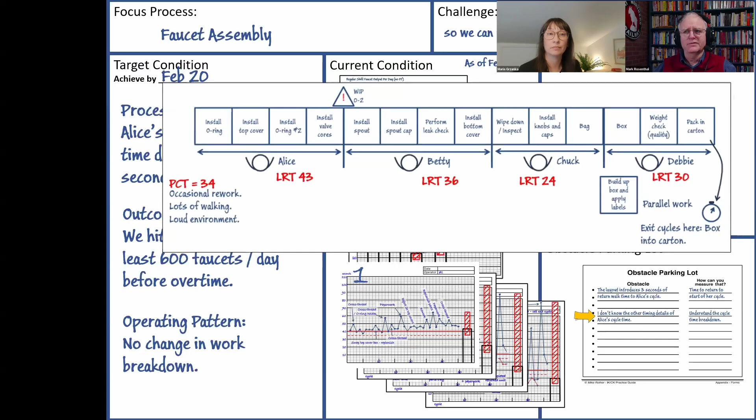Okay, what is your actual condition now? So the actual condition now is against the challenge of 700, and then the current requirement of 650, and you can see that we are on a daily basis, we're flirting with 600 and not even making that consistently. If I start looking at the process, the actual steps of the process, we've got 4 people: Alice, Betty, Chuck, and Debbie all working on the assembly line, and it's actually a pretty smooth flow. I just think there's a lot of issues with work balance and interruptions.

So you can see on the load chart here that the reason I'm going after Alice's lowest repeatable time is that her lowest repeatable time is right now even exceeding the takt time for 650 a day. So we're not even going to make 650 until we deal with that. Plus, you can see there's variation that cascades down the line. If I look at Alice's work cycle specifically, you can see that each cycle pretty much flirts along that line of just above 40, but there's also interruptions and variation involved.

I'm working right now just to drop the floor there so that we can at least start to get some consistency and see what the impact of the variation is. Okay, what did you plan as your last step? My last step formally was to just do some math on those lowest repeatable times in order to see if 4 people are even possible to get this done.

And what did you expect? So I predicted that 4 people were going to be enough to get to 650 if we can address the wait times and the variation. And what actually happened?

Well, math gave me a 3.9. So, yep, 4 people, we should be making 650 with 4 people.

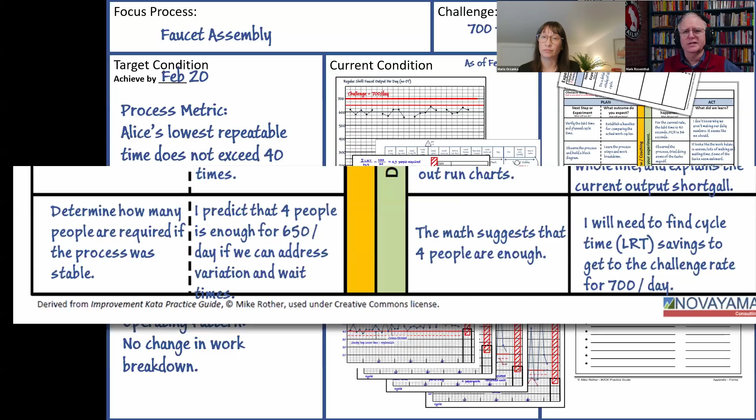So what obstacles do you think are preventing you from reaching your target condition? So there's a couple right now that are obvious. One is Alice's cycle includes 3 or 4 seconds of return walking time. And the other one is I don't know what other timing details are affecting Alice's cycle.

Which one are you addressing now? So I need to get more information. So I'm going to address the fact that I don't know enough of the details for Alice's cycle time.

And what is your next step? So my next step is to get back out on the line and do a detailed time study of Alice's work. And what do you expect? I expect to learn where the time goes, and just to put it in the most simple terms, what are the sources of delay? Where's the time going? Where's the wasted motion here?

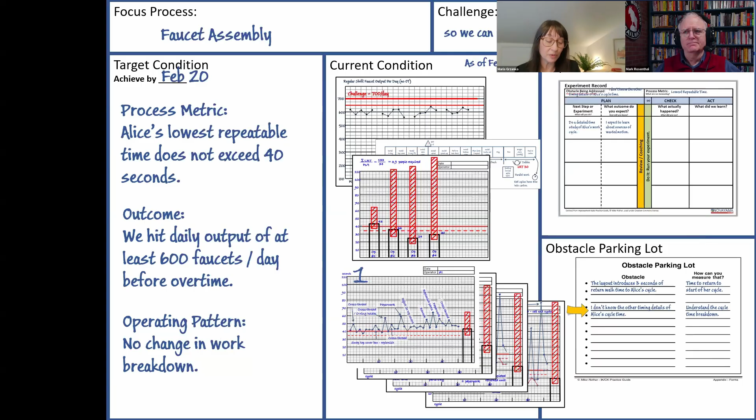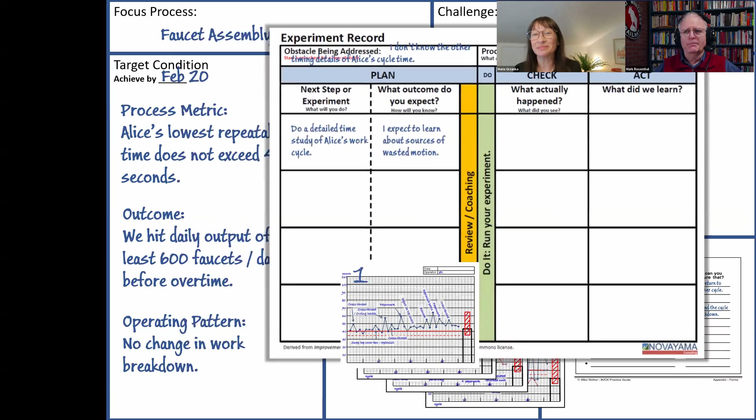And how quickly can we go and see what you have learned from taking that step? Actually, I expect to be able to do this in a couple of hours, so we can talk about this tomorrow. Great. Thanks, Mark. Okay, with that as a baseline, let's look at where we are.

Let's orient. Those 5 coaching questions happen here. So a target condition's been established, and now we've got obstacles, and this is where we get the coach into the cadence of those 5 questions.

In our last episode, we covered understanding direction or challenge, and that shows up on the storyboard here up in the corner, where we write down the challenge and we establish that.

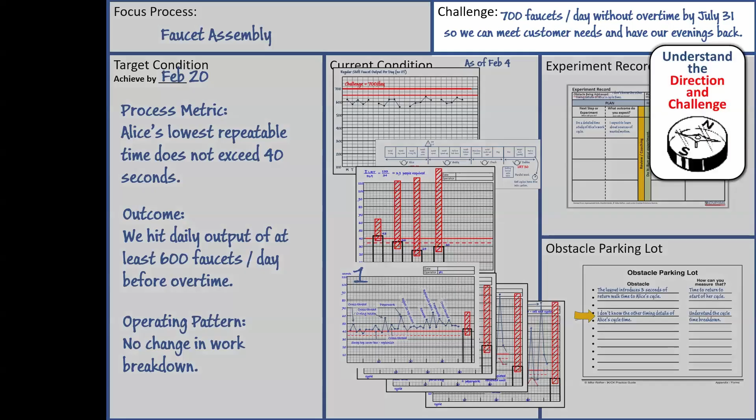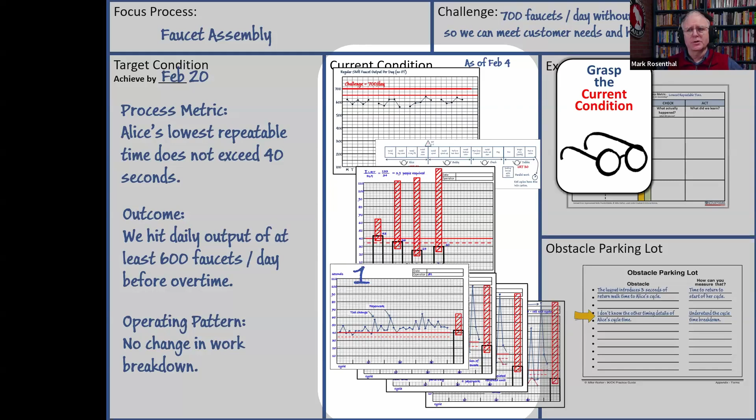Today, we are talking about this step of grasping the current condition, which is what shows up on the storyboard in the center part. And there's a lot here, and what I plan to do is just go through each of these artifacts a little bit quickly about how they're made, but really the context is what information is the learner gaining by actually doing this work.

There's some key questions we want to coach our learner to finding the answers to. How are we doing against the challenge? And that's establishing that outcome metric, which Tracy talked about last time. Where are we versus the goal? What does the customer need? When do they need it? What's the definition of on time and defect free, if that's relevant?

How are things operating now? What's the normal pattern of work? What are the actual process steps that people are carrying out today? And what is the actual rate and timing of the cycles of output at each step of the way?

Do we even have capacity? If I do some math, how many people would be required for success if our process were stable? And do I have machine constraints? And then really, what does all this mean? Why does the process perform as it does?

And the coach's objective is for the learner to be able to really answer questions like these and point to facts and data to answer them, not just speculation.

So I'm going to start really quickly with the first, because Tracy kind of linked to this last time. If I look at the storyboard, as I'm taking that challenge and I'm just pulling it down, I'm saying, what do I need to measure to tell me if I'm meeting the challenge? In this case, it's really easy and really obvious.

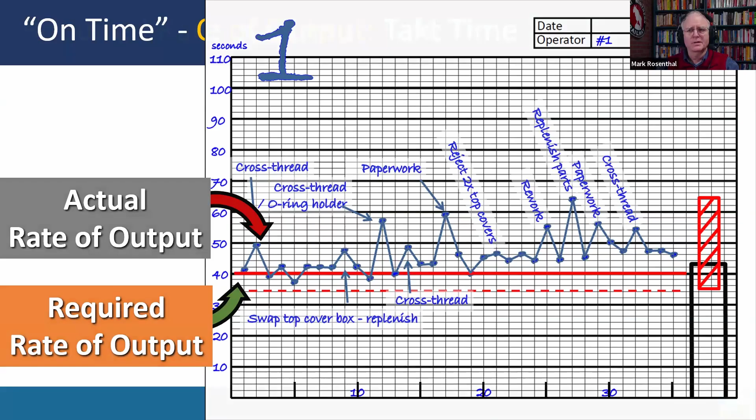It's just math in this case. I've got a one shift operation, it's 8 hours, that gives me 480 minutes, but I've got breaks, a meeting, some cleanup, so I've got 435 minutes to actually make stuff during the course of the day. That's 26,100 seconds. Right now, even before we hit the challenge, we need to get 650 units out every day.

So pretty simple math. If I take how much time I've got to get 650 units out and divide that by 650, we need to be finishing a faucet every 40 seconds to be successful. In the simplest form, that's what takt time is.

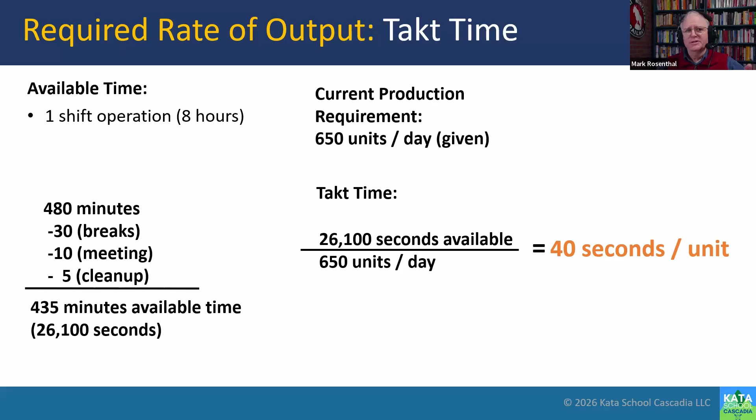But this kind of creates a question, and I'm just going to ask the group, put it in the chat, speak up, okay? If I were to plan my line to just be able to meet that 40-second cadence, what would happen as I tried to run? Any thoughts? Yeah, I wouldn't make it, okay?

Stuff would happen, okay? Any hiccup is going to put me back into that overtime. Yes, this is what would happen if I planned to run 40 seconds per faucet. Fail, yeah, okay, all of that stuff.

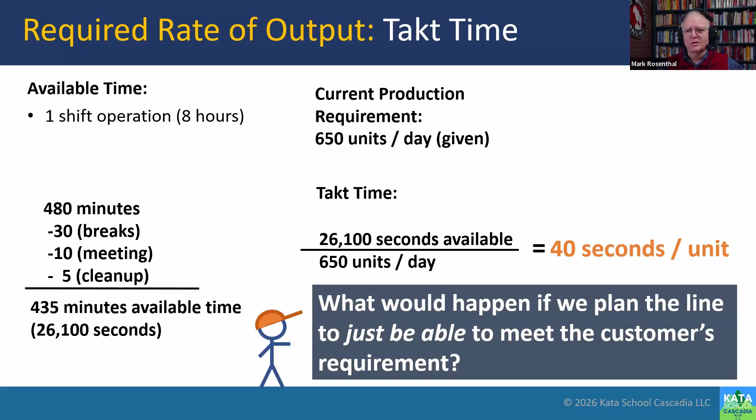Here's what I want to do: put a little time in my back pocket. So we have this thing called planned cycle time. That's Kata jargon. I think some folks at Toyota call this operational takt versus customer takt. Whatever that is, whatever you want to call it, I don't care.

But this is the speed we are actually going to plan to run the line at, and it's going to be a bit faster than that customer takt, so we've got some time to put in our back pocket. A good rule of thumb to start with is to just derate and take 85% of the takt time and use that as your planned cycle time.

You can do fancy math on it, but let's just start with this as a goal. And then as you learn more, maybe you can run the line a little tighter as you get some stability.

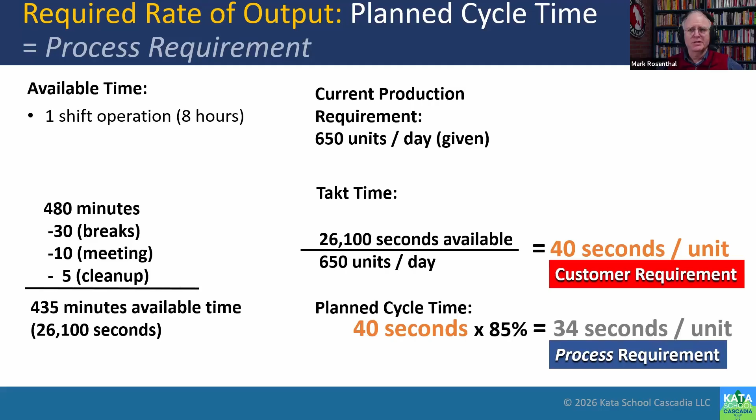So the way I like to think of this is that takt time, that 40 seconds, is the customer requirement, but we've got a process requirement that we're going to try to hit, which is 34 seconds in this example. So what that means is if the process cycles are longer than 40 seconds, we're falling behind.

So I want to design the work so that if we have a problem-free cycle, it's going to hit 34 seconds in this case. And what that does for me is every time I'm successful at 34 seconds, I get to put 6 seconds in my back pocket and I can save up a little bit of time.

And if I do have a disruption, after 10 cycles, I've got a minute and I can start to absorb some of those delays and unforeseen things, still be successful at the end of the day, but have a little bit of headroom that we can use to respond to issues for line stops and all the rest of that. That's the whole idea here.

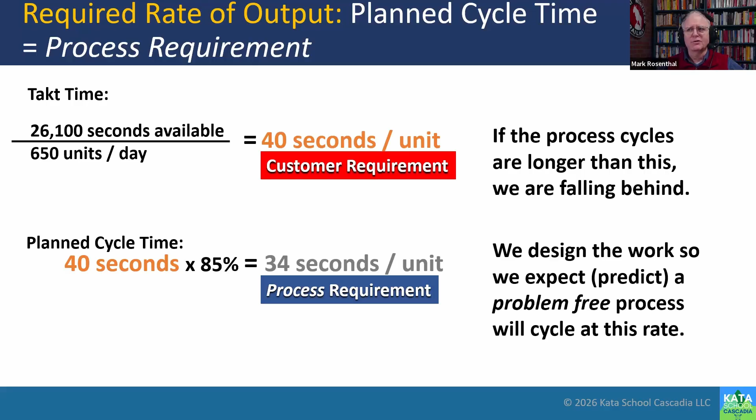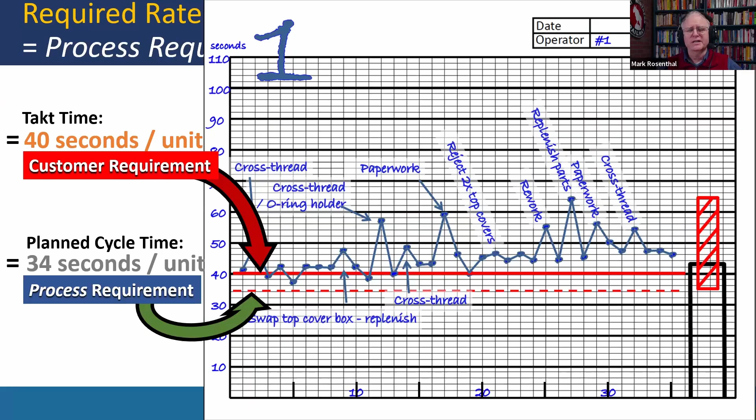That would be ideal. Okay, now that was takt time. That's a classic industrial example, but in all cases, I want to establish some kind of reference standard that tells us what should be happening with respect to timing. And it can take a lot of forms. This is just the classic, and we're going to stick with that right now in the interest of time. Now we've got some parameters. The next question is, what's actually going on the line? We've got two pieces to this.

The first question is, what are the actual process steps that are happening now? Our standard fallback here is a block diagram. I'll show you a couple of examples, and then I'm going to show you how to make one.

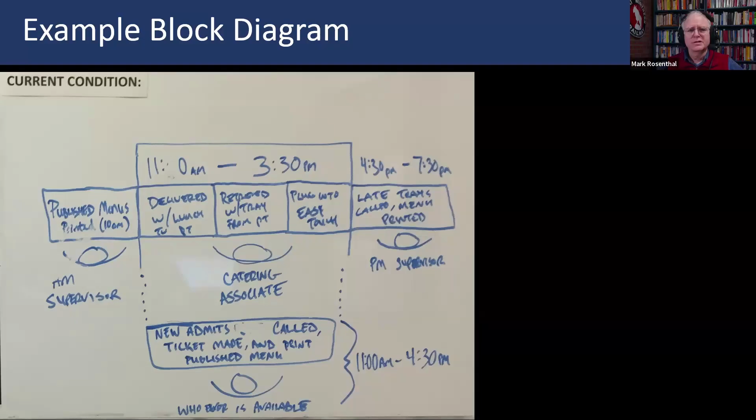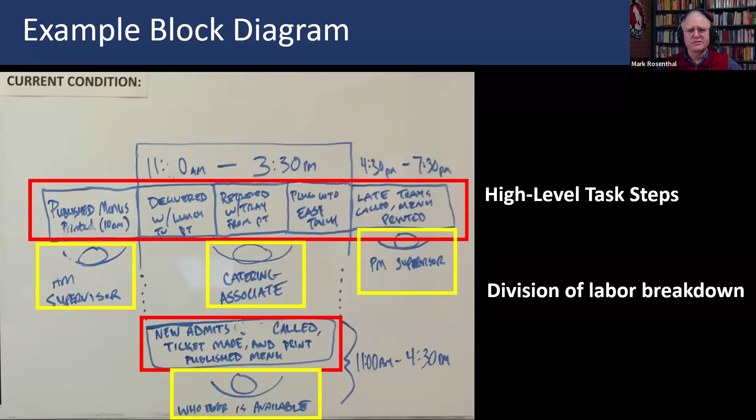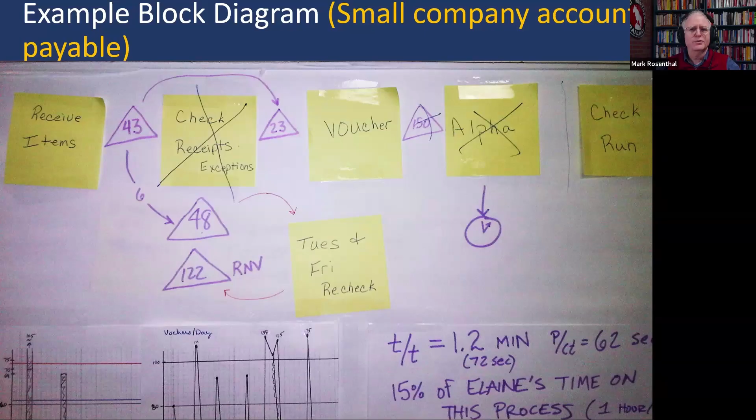So they've already modified and are keeping up with their current condition. And by the way, you can kind of see those run charts and takt times down here, even for accounts payable. So you can start to see some of the artifacts here.

The first step in building that block diagram is just to identify what those primary work steps are. You've got to go to the actual process. You have to actually watch it, and you can't do this from memory. You can try—hey, this is another technique—write down what you think happens and use that as a hypothesis. Then we can look at what actually happens and see how right we are.

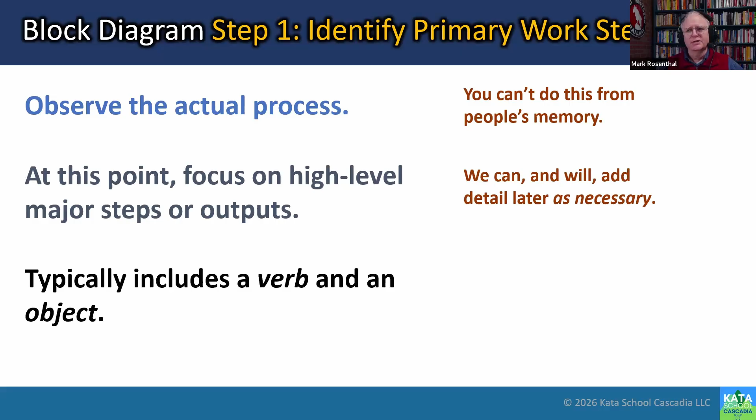At this point, we just want to focus on the high-level steps. We'll add detail later if we need to. I just want to get a basic understanding. So typically that task would be a verb and an object: enter customer info, insert marzelvanes, send invoice—one task that has a 'done' to it.

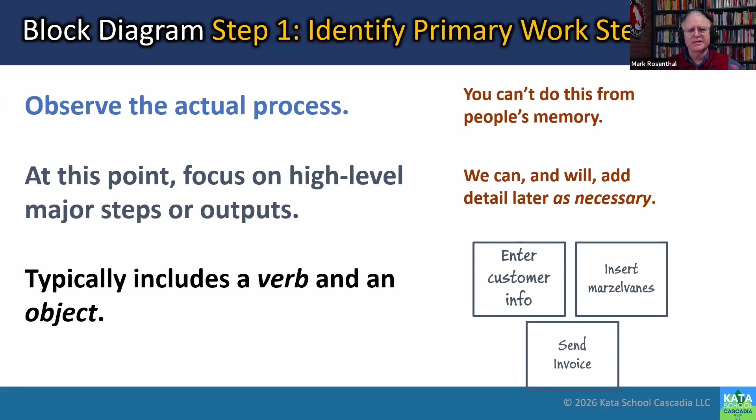So just as a demonstration, I'm going to go through and make a faucet on the line. I'm going to run this at 3x speed. It takes about 2 minutes; it's going to take 30 seconds here, just so you can get a feel for the kinds of things we want to write on the block diagram. So let's just follow a faucet around.

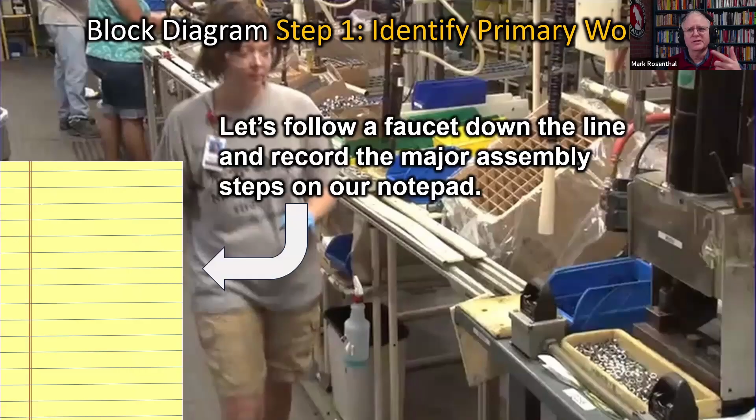This first operator is Alice. She's the one I've been focusing my attention on. Again, this is 3 times speed, just so we don't end up watching this for 2 minutes. We would slow it down if it was actually training and practicing doing this.

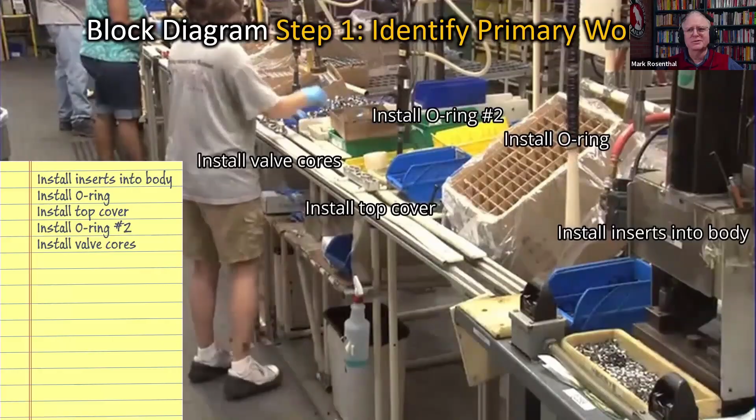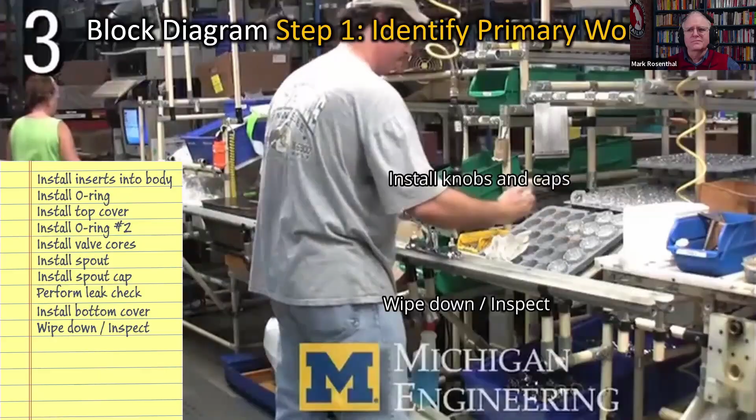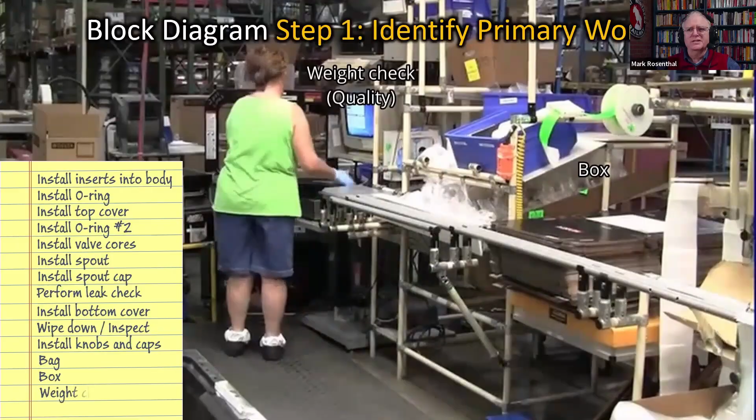So there's the faucet she just finished. It gets boxed, it gets checked, and put in a case. So that's the whole process, obviously really quick.

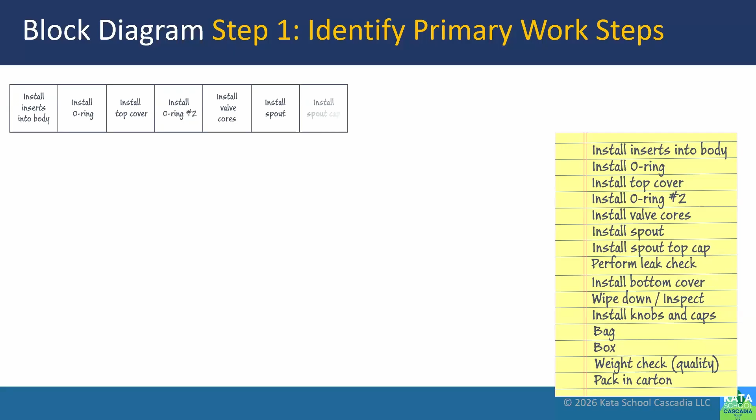It normally takes a little bit of time to get down there and really understand, but now I've got a list of the tasks that I think are going on here. So I just want to build literally a block diagram, which means let's put those tasks in blocks. And now there's the fundamental.

So let's add some more information. Are there any automated steps? In this case, there aren't any, but if I have an automated task, that's something that can run unattended—maybe I load a machine with a unit, get it going, and then the operator moves on and does something else while that machine runs unattended. That's what we mean by an automated step.

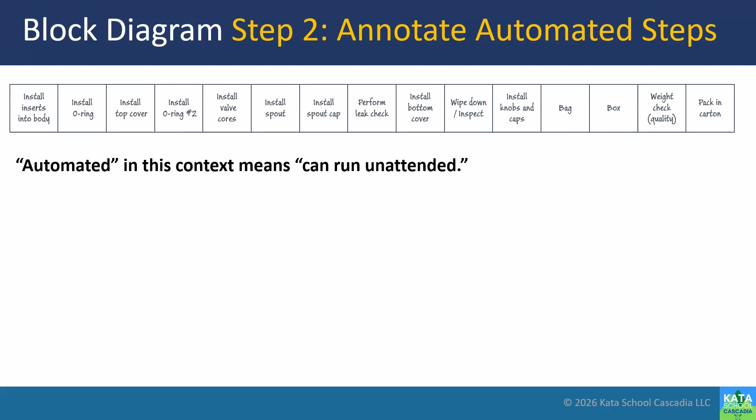In this case, they're all manual, but if you have automated steps, just indicate that above the block. For example, a CNC machining step: I load the machine, I start it, and then I start processing the unit that just came out. Just make a note that this is running without a person.

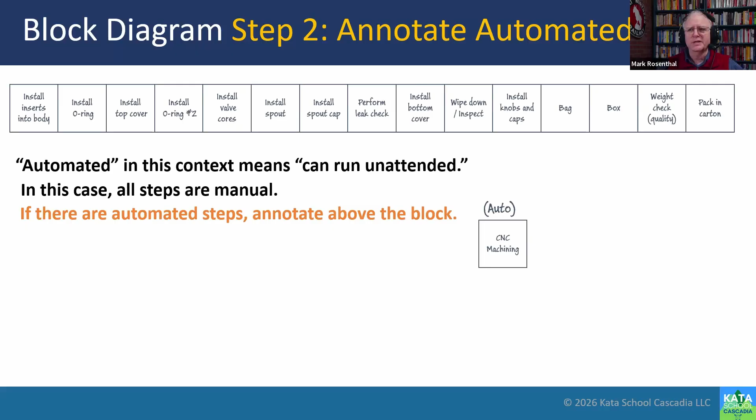Now, next question: how does the labor divide? In this case it's pretty obvious—again, this is a pretty simple example. So what are the work zones of each individual team member? This is going from left to right. Sometimes it's a little confusing because the line goes from right to left in the video.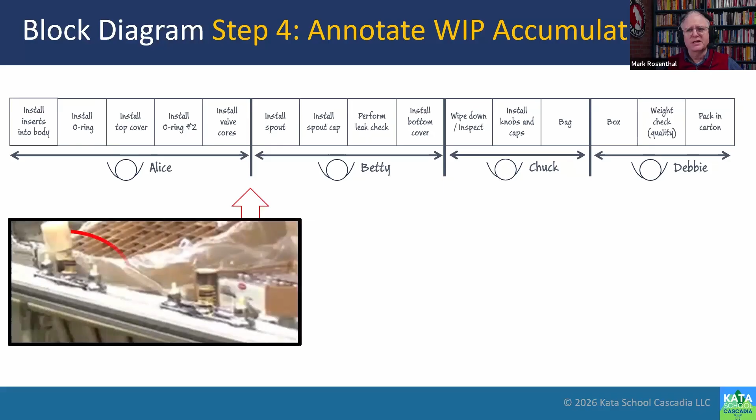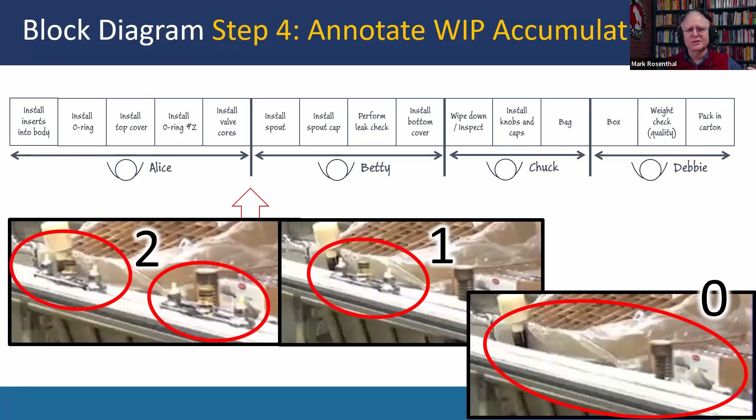Okay, then where's WIP accumulating? We saw a little bit of it in the video, right between the first and second operator. Sometimes we end up with 2 faucets there, sometimes 1, sometimes none. In your case, you may have dozens or hundreds of units of WIP between processes. That's cool, just make a note of it—we use a little warning triangle. In this case, the WIP varies between 0 and 2 pieces.

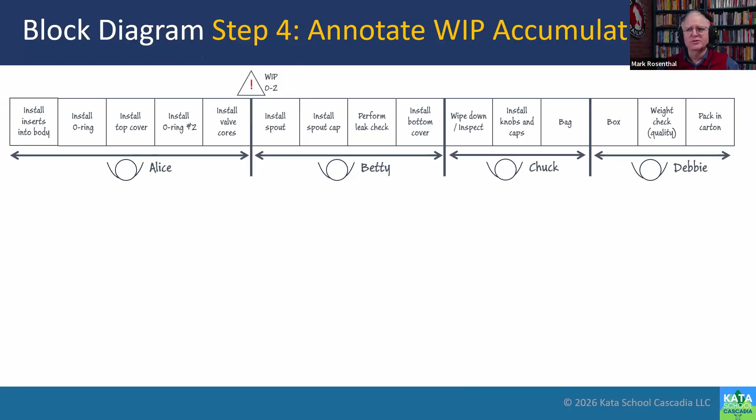Now, what else is going on that's not part of the process? Characteristics that may materially affect the work: occasionally I see some rework, anybody will tell you there's lots of walking. I turned the sound down, but there's a pretty loud environment in there. And also, in the last operation, there's parallel work going on because Debbie's building up boxes while she's waiting for the next faucet.

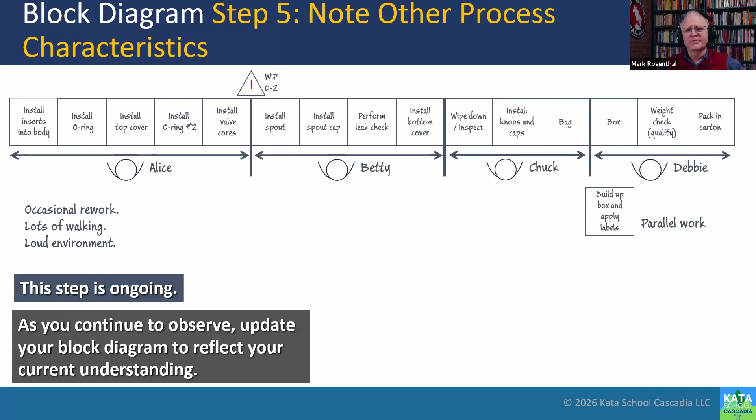So all of this noting of what's going on is ongoing, as you continue to update. And you'll see lots more once you start timing cycles, because you'll end up spending more time down there.

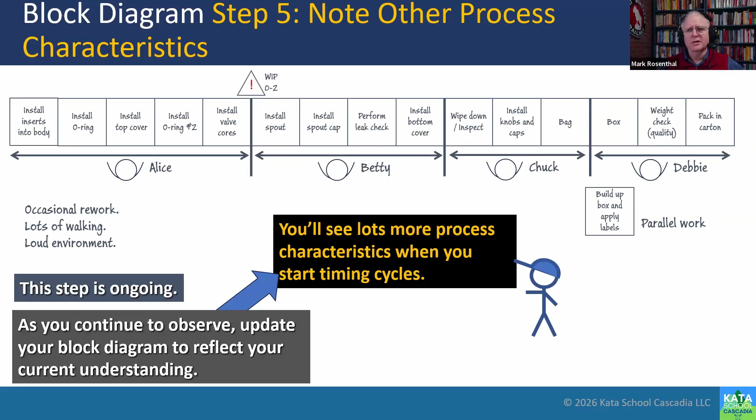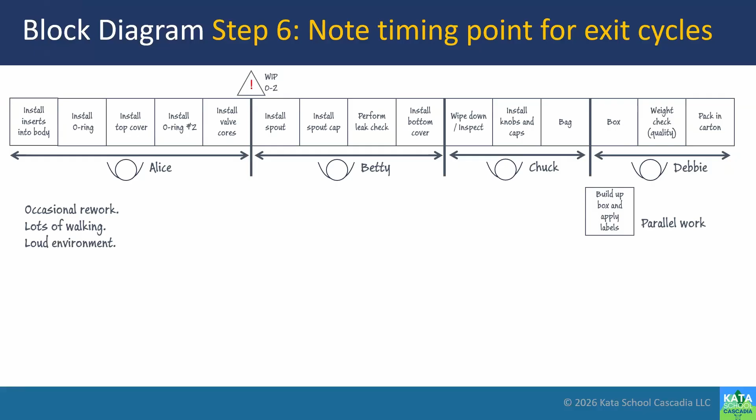Okay, so the last piece here is if I wanted to look from the customer's perspective of what they're seeing as a cadence of output, where do I want to time that? In this case, it's really simple. It is at the end of the line. When a faucet goes in the box, boom, that's the next faucet. Sometime after that, there's the next one. That's going to tell us if we're making takt time.

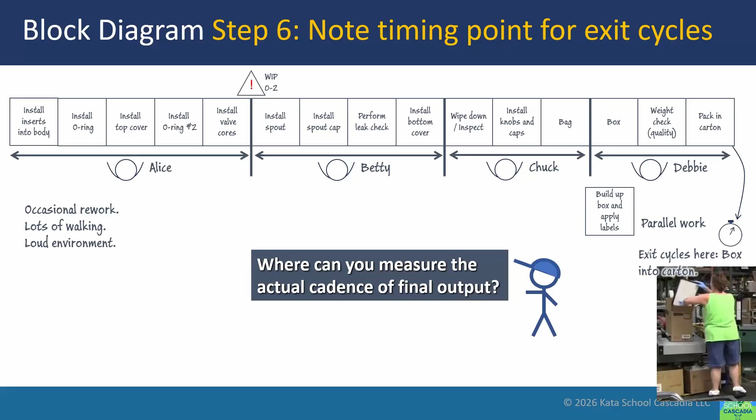As you're going, you want to update it. This is going to change, especially as you're rolling through target conditions. If you're changing the process, keep this up to date so that it always reflects the actual condition now, rather than, hey, here's what we did when we started this.

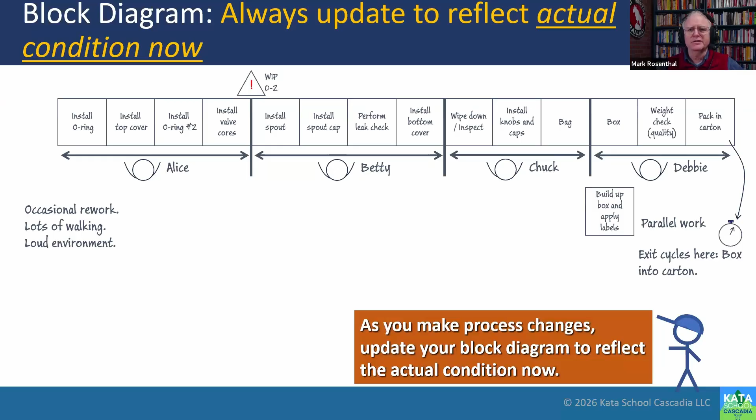I just wanted to jump in to pull us back for a minute. In the coaching cycle we did in the introduction, there was a lot of information that Mark shared in response to the question, what is your actual condition now? So he's showing you all these things to gather information about the current condition. Typically this takes a bit of time to gather. So although we're showing it to you in this condensed version today, keep in mind this might take multiple coaching cycles over multiple days, or even a big block of time like a half day to gather all of this data.

Because what we're really trying to do as a coach is teach our teams, teach our learners, how to analyze and understand the process they're working with. On a line like this one, it would take somebody who knew how to do this a couple of hours. But each step could be an entire coaching cycle, asking, okay, what's the next thing you need to learn? What's your step to learn that? And just rolling through each of these steps as we go.

So a little bit every day is a good way to break it down, rather than trying to pull your line supervisor away from supervision for four or five hours during the course of a workday. So this can be progressive, and that's a really good point.

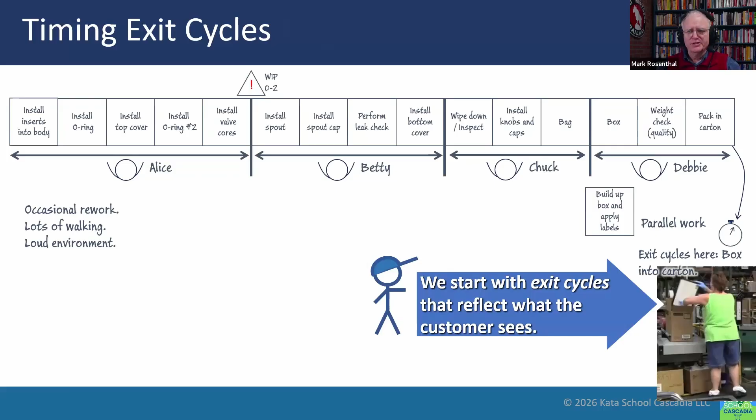So we've got the actual process steps, but now, okay, what's the actual rate and the timing of output? Here's where we're going to build those run charts. We start with the exit cycles that reflect what the customer sees, but we also want to get the timings of every major block of work. In this case, the last operator cycle and the exit cycles for the cell are the same thing, so we don't have to do that separately. But there will be cases where something other than a person's work is pacing the end of the line, in which case you may end up having to do that twice.

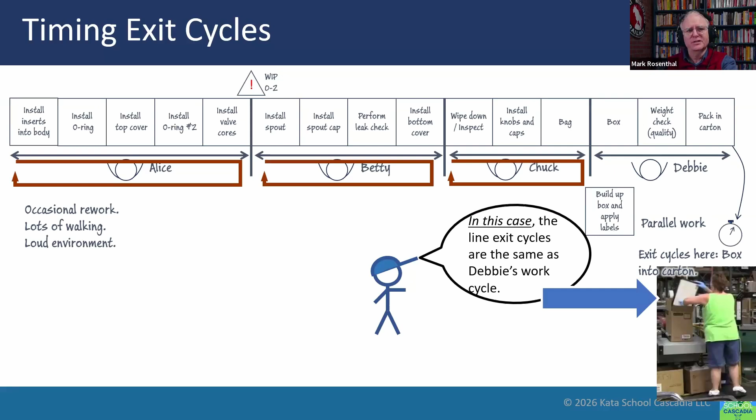Here's what we're interested in timing: the time interval from when one unit comes off until the next unit comes off the line. That's what an exit cycle is. And of course, we can have exit cycles for individual operators as well, which is what those other charts are going to be doing. We're not right now looking at the flow time through the whole line.

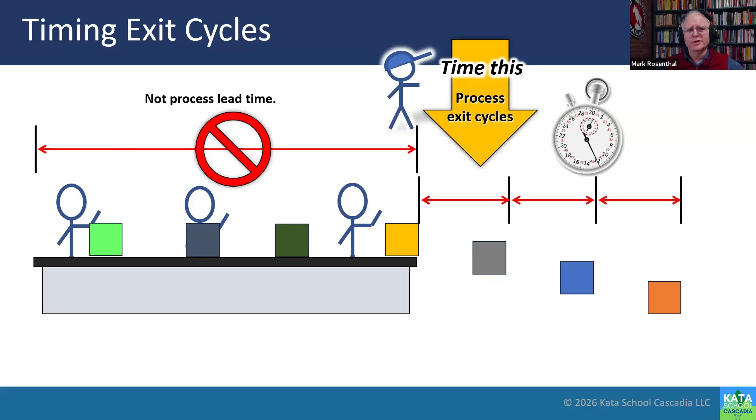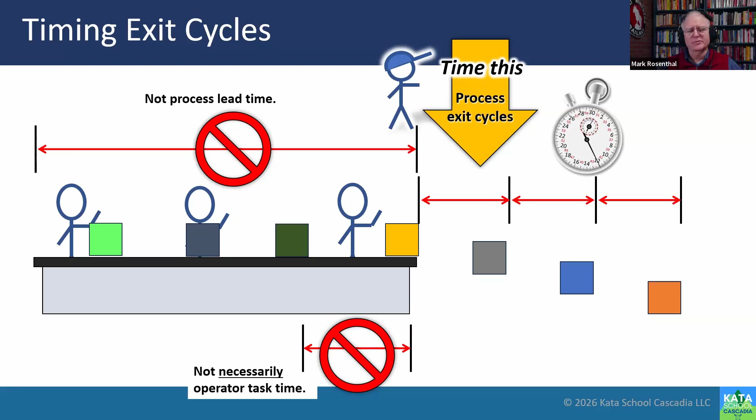And the reason I'm going through this is people have different definitions for what they mean when they say the words cycle time, and they're all right. It's just to be clear amongst you, when you say those words, what do you mean in this conversation? What we're looking at in this conversation is the cycle versus the takt, not necessarily operator task time, although in this case it's all operator task time. But again, if I've got machines in the middle, I want to look at exit cycles from the perspective of the product moving to the next operation.

Ideally, if you've got time, 20 or 30 cycles is great, because of the law of large numbers. After about 30 observations, if nothing changes, whatever you've seen, you're likely just to see more of it.

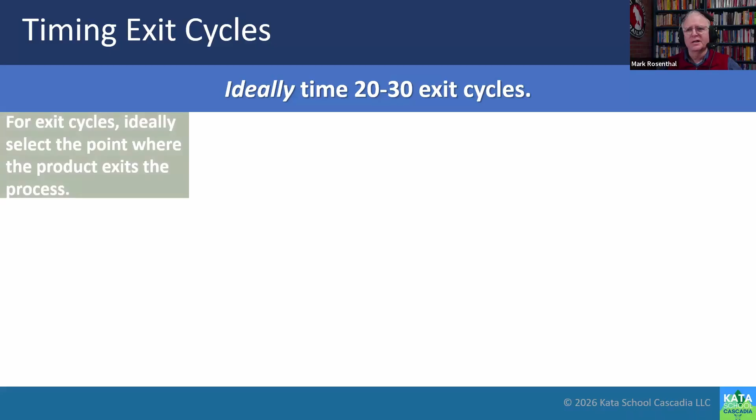In this case, you want to find a place—if you're trying to time laps in a foot race, wherever you stand on the track doesn't matter, right? You're just clicking your lap timer every time the person or the car goes by that point. So you do want to pick some kind of observation point where you can clearly say, okay, that one's done, next one's done. For an exit cycle, if it's at the end, that's ideal because it just helps wrap your head around it. We're going to use the product in the carton for this example, and just let that stopwatch run until that cycle returns no matter what. And I'm going to show you an example of this in a bit.

If there's wait time, if the person is waiting consistently, you want to make notes of that because that's important, because if they're waiting every time or nearly every time, when we look at total work content, we want to pull that out, and we'll show that in a second. And if you see a lot of out of cycle work, driving variation, make some notes of that.

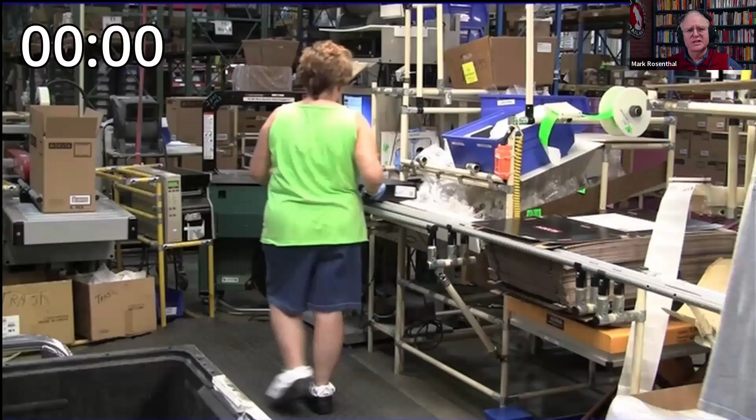This is really effective if you've got a couple of people doing this, one taking notes and the other just grabbing the times. Here's an example. I'm just going to go through about 6 or 7 cycles. I'll speed it up when it's relevant, but it's going to slow down in the middle to show you another good one. Okay, let's just watch.

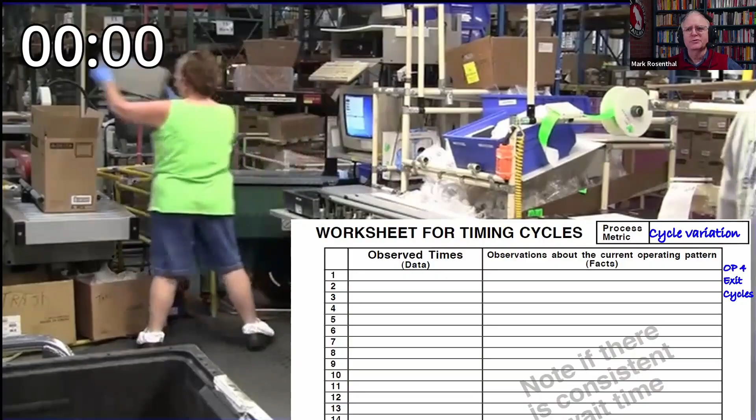Okay, so number 0, right? She's halfway through the cycle. Boom, that's where I start my stopwatch. That was number 0. So now we're timing the first one.

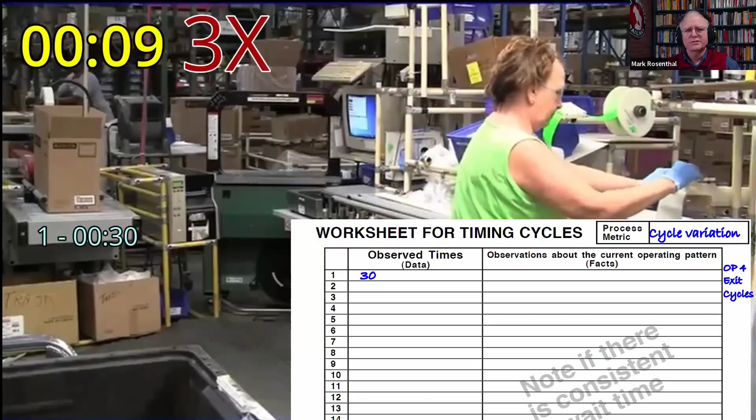A little bit of waiting there. Okay, weigh it, put it in the box, 30 seconds. Now we're just going to speed up for a couple more just so you can get an idea of the cadence. And you can see on the lower right here, what we're doing is we're making notes.

Now, slowed back down to real time because I'm going to keep that stopwatch running on this one because she's doing other stuff. Huh, this is really interesting.

So what's going on? Well, I make some notes here. Okay, she had to build up a carton and she disappeared back in the back. You can see her under the timer.

She's doing something back there. Okay, what she's doing is she's schlepping 3 cartons off of the conveyor onto a pallet, and then she picks up her regular work cycle, but that added another 40 seconds or so.

So this is just the process that we want our learner to learn in order to see what's actually going on.

The next couple are pretty nominal, but you can see that there's some small amounts of variation, but it's pretty consistent, right? When she gets in a rhythm and nothing's interrupting her.

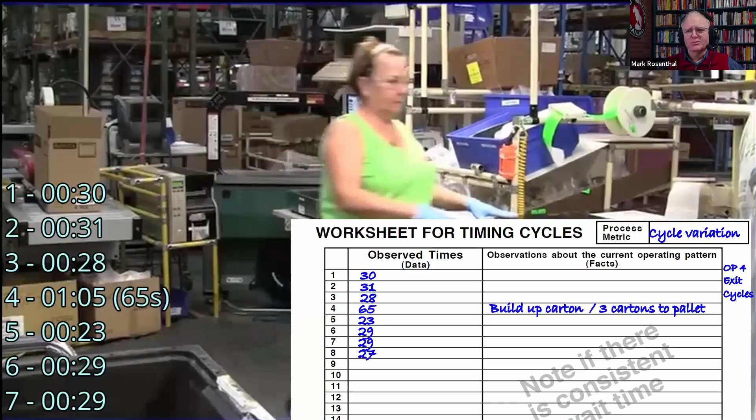So we just want to continue this process of getting these times and watching in order to understand what's going on. Okay, so the next one was 27, next one's 35.

There was a little bit of wait time. And if I continue, I'm just going to keep getting cycles.

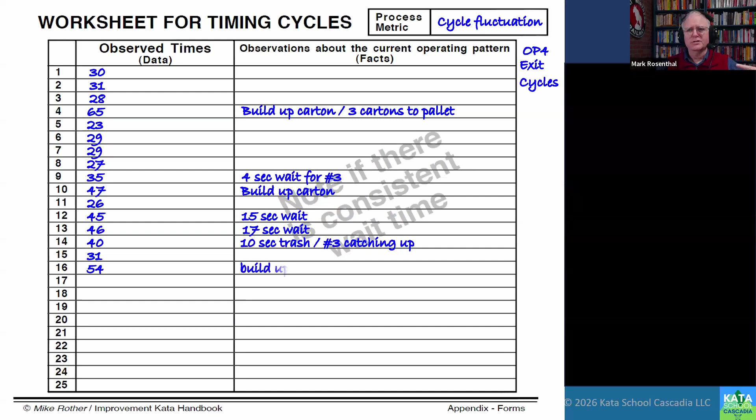By the way, this whole process in this case takes about 20 minutes, just to give you some perspective. And I got 36 of them, I think. And you can see there's a lot of wait starts to come into the play.

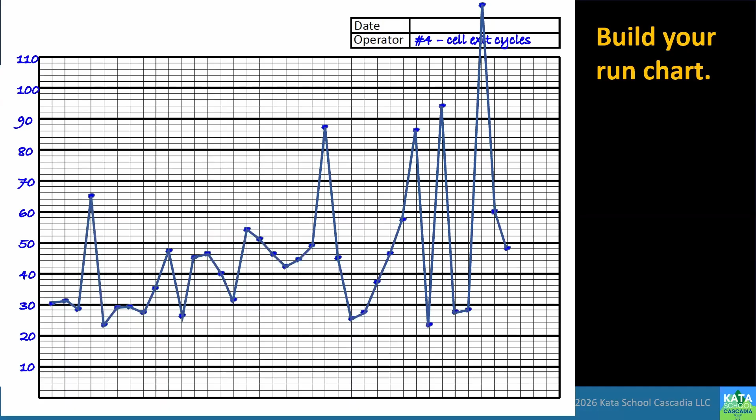Now, I want to take those times and I want to build up a run chart. And I can now really start to build a picture of what's going on right away. Holy moly, there's a lot of stuff happening here.

Now, how does that compare? Well, there's my takt time is 40 seconds. There's my planned cycle time. And we're starting to get a picture out here of what's going on.

The next thing that I want to know is if we had a stable process, right? If there was basic stability, what would the work cycle be if there weren't for all this variation?

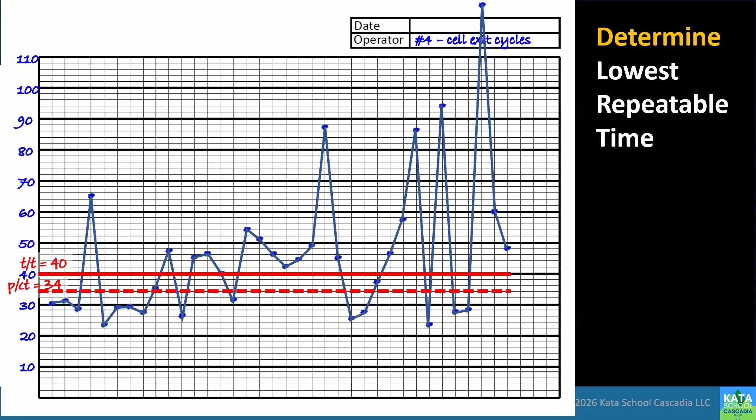And the easiest way I've ever been taught to do this is just take a ruler, and when you start bumping into dots, that's probably a good spot.

I would expect different people to vary. Some learners will be plus or minus a second or two on this. I'm not that concerned about it. We're just trying to get an understanding.

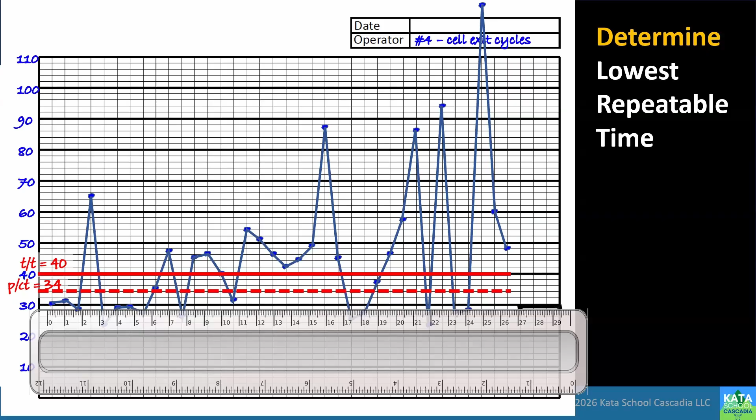But in this case, I'm going to say my lowest repeatable time is 30 seconds for this operator. The next question is, what's the range of variation?

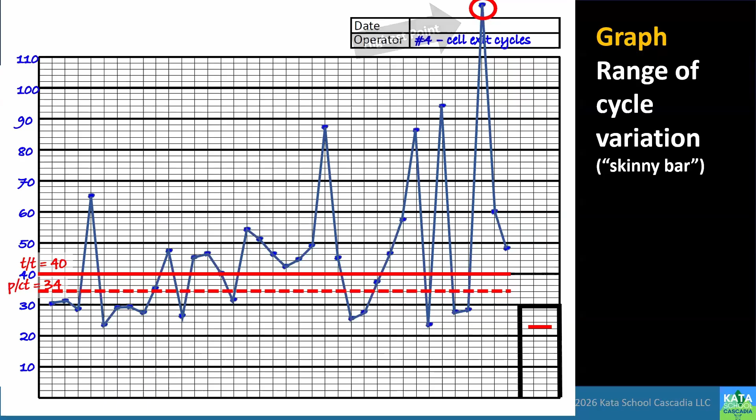And I want to build that on the chart. So let's take the lowest point, and let's take the highest point, and let's just build a bar between them. So right now, this is right out of the book, but maybe I want to add some notes.

So now I can see some of the sources of variation that I was able to capture. And this is just making this richer so that my learner, if they have all of this stuff on here, they can more easily explain it to me or explain it to someone else, which means they understand it better.

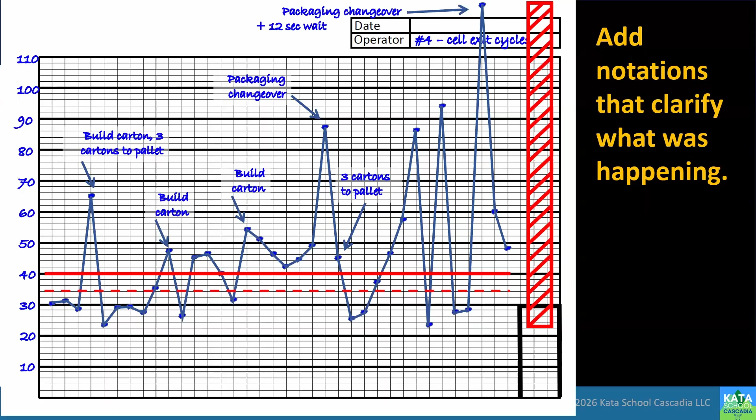Maybe there's a consistent wait time. So what would those cycles have been, right, if we didn't have the wait time? So, if that's relevant, I want to add those. Does that materially affect the lowest repeatable time? In this case, not really.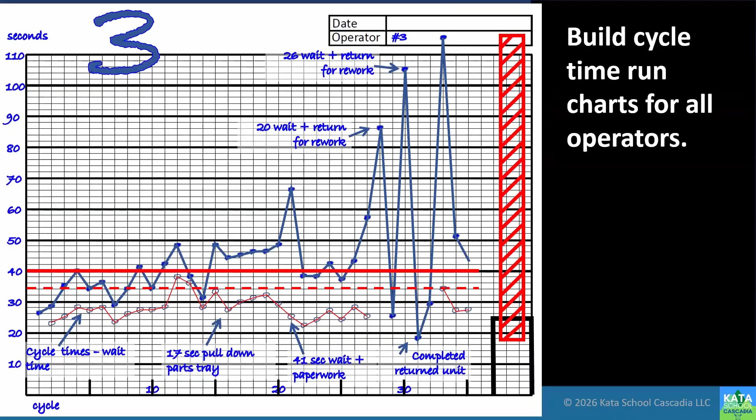In this case, if I took the lowest repeatable time just based on the blue dots, when I take that wait time out, there is a material difference. So I use that as the lowest repeatable time here. And there's the one we just did.

So I can start to see a pattern developing. I just kind of want to pause here. Okay, so we've got a lot of stuff here.

We started out with that output run chart against the challenge. Then we went out and watched the process and built the block diagram with all the extra notations on it, division of labor, where we're going to get the exit cycles. And then each of these 4 graphs is looking at the exit cycle and the lowest repeatable time and the variation for each of the 4 operators.

So we're working with our learners to be able to analyze their processes in these ways so that you can get to the target condition of, I need to focus on operator 1 first. Yes, awesome, okay.

Paul asked if I'm doing multiple shifts. Yeah, especially if you're seeing different outcomes on the different shifts, which is very frequently the case. I'm not going to understand why I'm having those different outcomes unless I go and look at what's going on each of them.

By the way, here's a real world example that came from our Kata Together event in Chilliwack a couple weeks ago. This was interesting because this was a line with an 8-minute takt time, and the total work cycles was about 8.5 minutes, and we're going to get to why that's relevant in just a second.

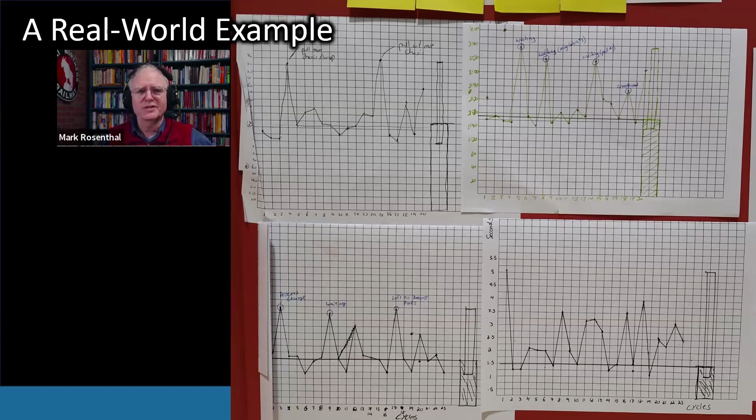Okay, next is, do I have capacity? So one of the things I like to do is take those bars that are at the end of each of the cycle charts and put them on one chart, which I call a load chart, which kind of gives us a summary of what's going on.

I've got my lowest repeatable times. I've got my total variation. I've got my takt. Now here's my question: if I were to add up those lowest repeatable times for each operator, I got 43, I've got 36, I've got 24, I've got 30. That kind of gives me the work content to build a faucet.

Here's kind of the question. If it takes 133 seconds to build a faucet, and I have to finish a faucet every 34 seconds, how many people do I need to be building faucets? Anybody got a guess as to how to calculate that really quickly? Yeah, okay, yep, exactly, perfect.

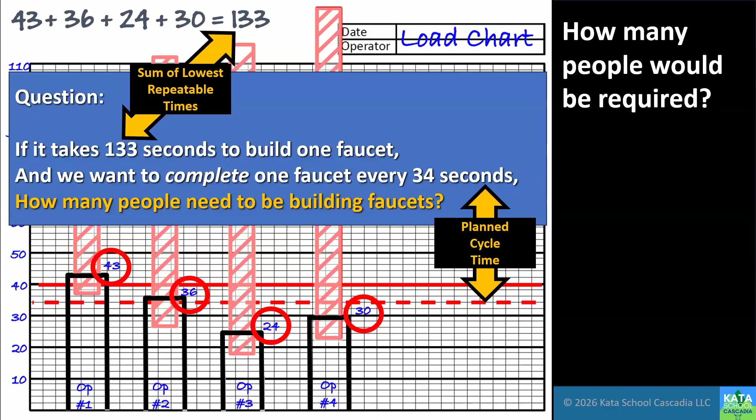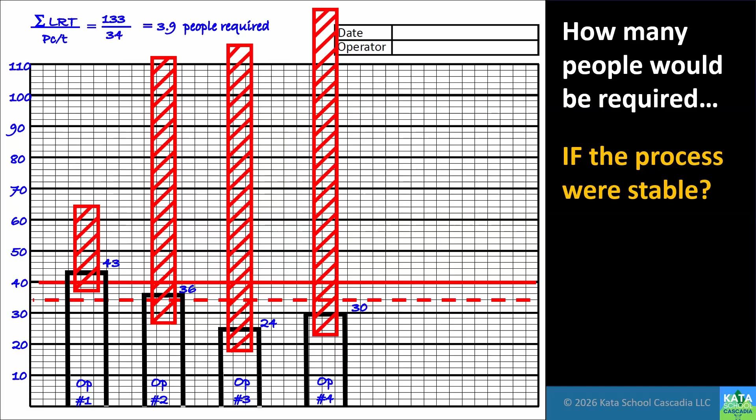Okay, if I were to take the sum of the lowest repeatable times and divide those by that planned cycle time, in this case I get that I need 3.9 people if I had a stable process. So the general model here is, if I ask how long does it take, and I divide that by how long have I got, the required rate, that tells me how many parallel operations I need.

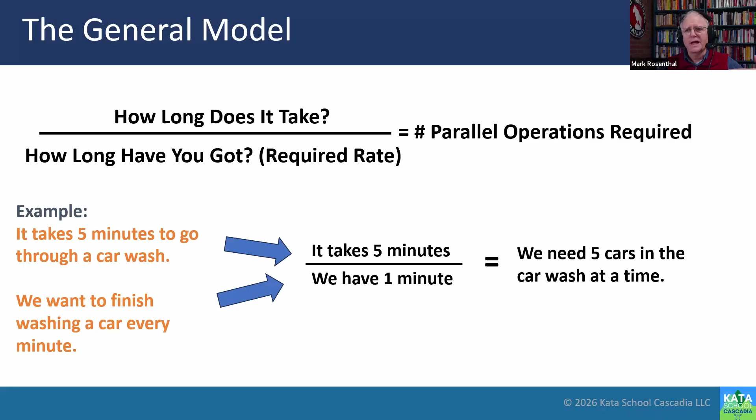For example, it takes 5 minutes to put a car through my car wash. I want to finish washing a car every minute. I need 5 cars in the car wash at any given time. That's straightforward math, which works for the capacity calculation across pretty much anything you do.

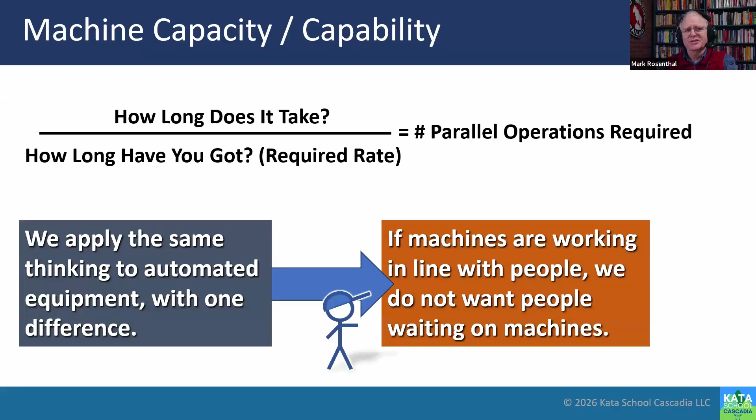Machines, we think the same way, but if I have machines that are working in line with people's cycles as a respect for people thing, I don't want people waiting on machines.

So if I look at what a machine cycle is, there's 2 components. If you think of your automatic dishwasher, you've got it loaded, you press start. It's going to run unattended for some period of time, and then it's done. Your next step would be to unload it and then load it again and then start it again. Those 2 things combined, the automatic cycle and the manual unload load cycle, give us a machine cycle time.

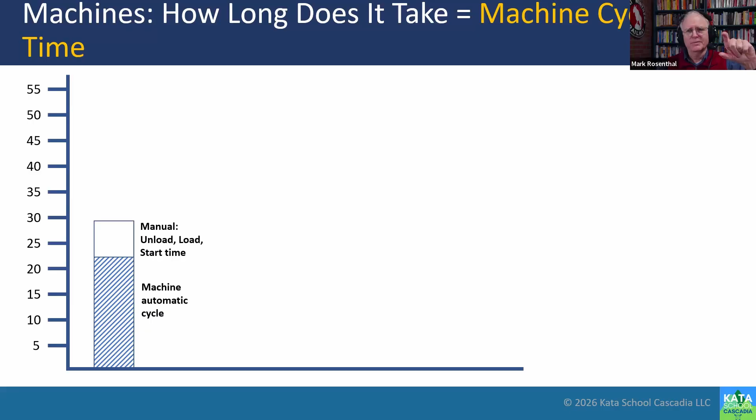There's my takt time in our example. There's my planned cycle time. Where I want to try to get to is where that machine cycle time, ideally, I'm going to derate a little more and make it strive to have it maybe at 90% of that planned cycle time.

Now here's another example. In this case, my automatic cycle is the same, but the unload load time pushes us high. So that's too long, but because that's manual work, maybe that becomes a target condition, and at the working level, we can do improvements, we can Kaizen that in order to get that down under where we need it.

But if I have a case here where the automatic cycle pushes above the takt time, I'm into capital investments, I'm into engineering.

The supervisor can't do anything about that. So all this step is a sanity check to make sure that if we're asking somebody at the working level to improve the line, that they can actually meet the goal. In this second case, they can't. There's nothing they can do to get more out because that machine is pacing their work. Just think of a machine as an additional worker on the line, and everything else pretty much applies the same way.

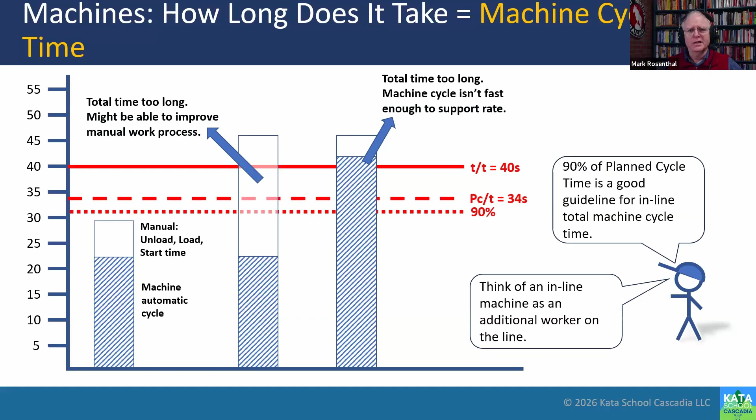Okay, finally, what does this mean? Why does the process perform as it does? Maybe a good coaching question for this point, or really at any point along here, is what is this information telling you about the process? That's just another form of what have you learned, but it's a little more direct because we are taking our learner through this in stages, and in each step a little more information comes out until it all gets together.

So finally, why are we doing this? We want to understand what the customer actually needs. We want to understand how well we're meeting that need. We want to understand the normal patterns of work in order to understand why the process performs as it does, so that we can get enough understanding to establish a target condition.

We are not looking for improvement ideas right now. It is what it is. It is a completely neutral, non-judgmental process. I'm not looking for waste. I'm just trying to understand what's happening.

Once we establish a target condition and once we start to work toward it, we are going to see the things we need to work on in order to get there. That's part of why we just want to understand how the process performs as it does. So in our next episode, how do we take all of this information and turn it into a target condition? That's where we're going to go at the next session.

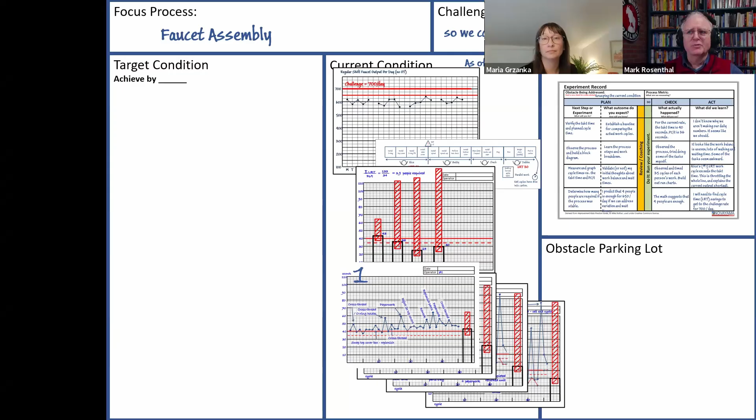So this is what the storyboard might look like at the end of all of this. This is a record of the steps of getting through this analysis, and I don't have a target condition yet. My next step at this point is to establish that target condition based on this information.

Does the employee know you are observing and taking time? You absolutely want to tell them and make sure they're cool with it. I've in some cases taught them to take their own times. That helped to defuse a lot of it. You have to be respectful first.

Is there a program that does this? Graphing process variation—'ink makes you think' is one of the things I'm fond of saying quite a bit. I would much rather have people not use software to do this. I would like people to actually draw the dots because that way they're getting the answers for themselves rather than just looking at what a computer does.

There's a question from earlier about your 85% buffer. What is the basis for coming up with a relevant buffer to put in, and what considerations need to be addressed? That's a guideline, but the consideration at the end of the day is how much buffer we need to make sure that the variation we're experiencing today does not cause us to be unsuccessful at the end of the day. Maybe we're going to have to get there—certainly this faucet line isn't being successful at the end of the day. So I'm starting with that 85% literally just as a place to start until I learn more. You can go into some pretty heavy math if you want, around amortizing your changeovers and working all of that into your actual planned cycle time as well. If you have that information, use it. That's a somewhat more sophisticated approach, but for a beginning learner, let's just start with this and see where it takes us.

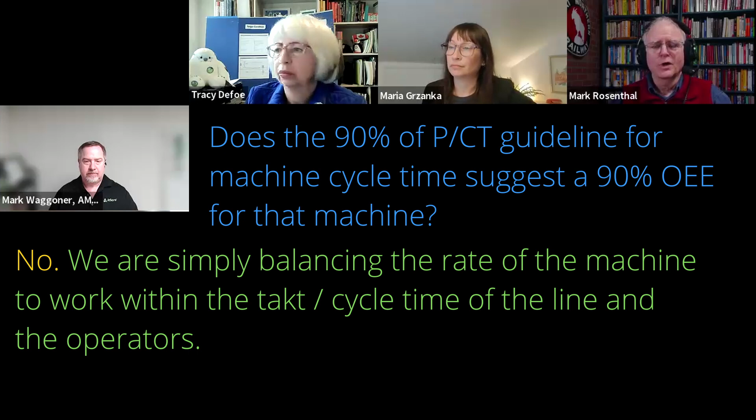Did that help? Hey Mark, I got another question in the chat around this run chart approach, not calling out common causes versus special causes. And therefore, it's not revealing if the process is in control or stable. How do you decide or prioritize which variants to review from looking at these charts before establishing a target condition?

Good question. Maybe we can go into that some depth next time as well. But I'm not looking right now from a statistical control standpoint. What I'm looking at is what's my requirement, because I have to meet the requirement at the end of the day. When I look at the steps that have to be done every time, there's my lowest repeatable time.

Anything that knocks me out of that is variation, and it's likely going to be special cause variation because there's an identifiable cause to it. Even against my lowest repeatable time, I'm going to have small amounts of variation just because there always is. There's my common cause stuff, and how tight do you want it to go? So let's not worry a whole lot about it until we have to.

When we're looking at statistical control, we're typically looking more at product characteristics than process characteristics as well. Let's get the process stable, and then we've got something to look at when we're looking at the places where SPC is appropriate.